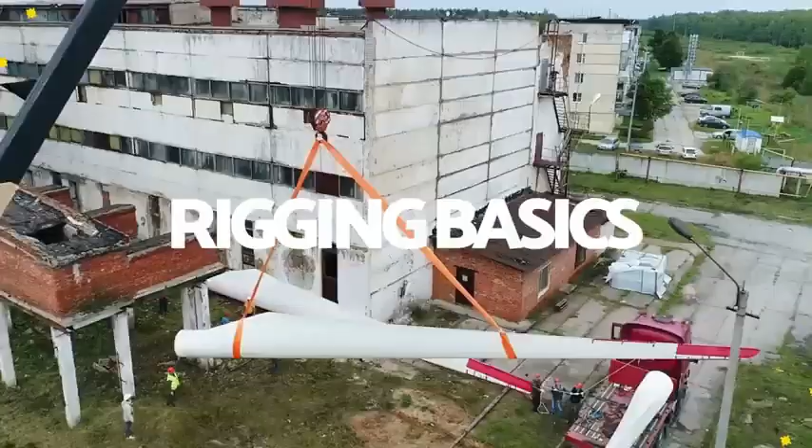In this video, you will learn some basic rigging devices, as well as some basic rigging techniques, and how to safely apply them.

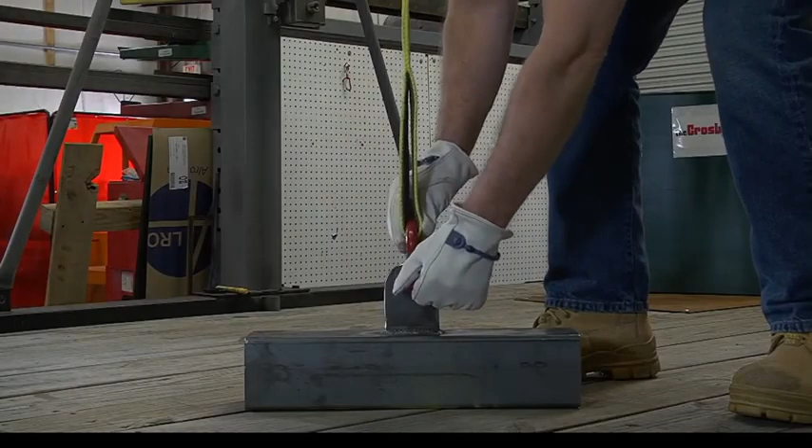In the world of rigging, there are three basic hitches: the straight leg vertical hitch, the choker hitch, and the basket hitch.

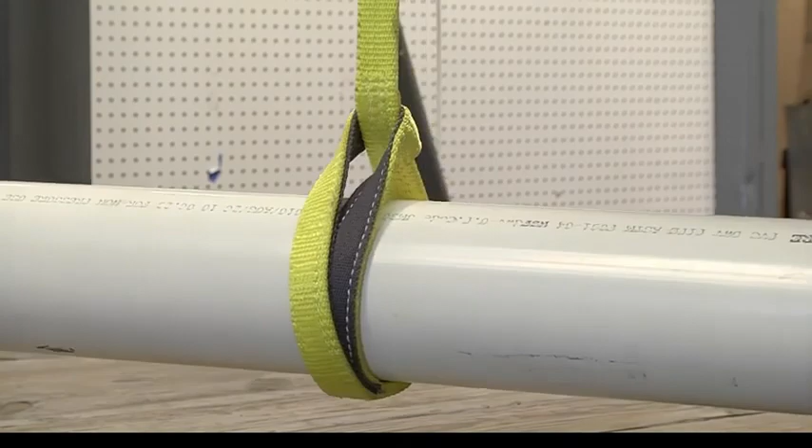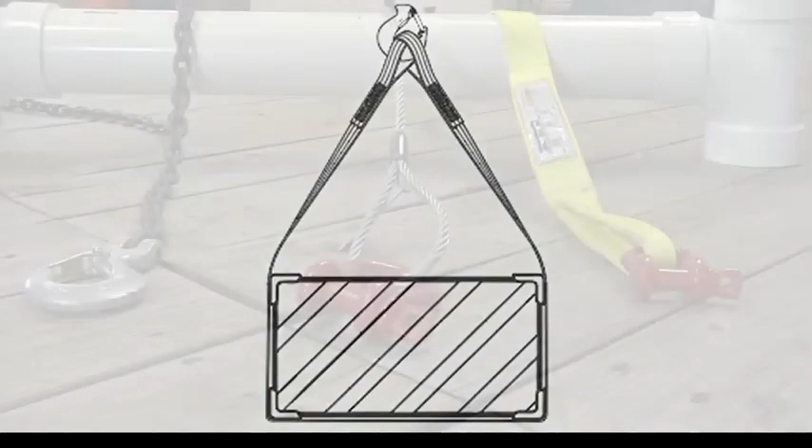Regardless of the type of sling or hitch being used, the user must ensure that the sling and rigging hardware have working load limits that exceed the actual loading imposed on the sling and the rigging hardware attached. Also, crane operators and riggers should be aware that by moving a load harshly, you can easily double the loading on the slings and hardware attached.

Synthetic or steel-based, web or round, wire rope, chain mesh. Slings are an essential part of any lifting and rigging situation, but can be confusing, and this confusion can create an unsafe situation on one of your job sites. So what sling is the right one for the job?

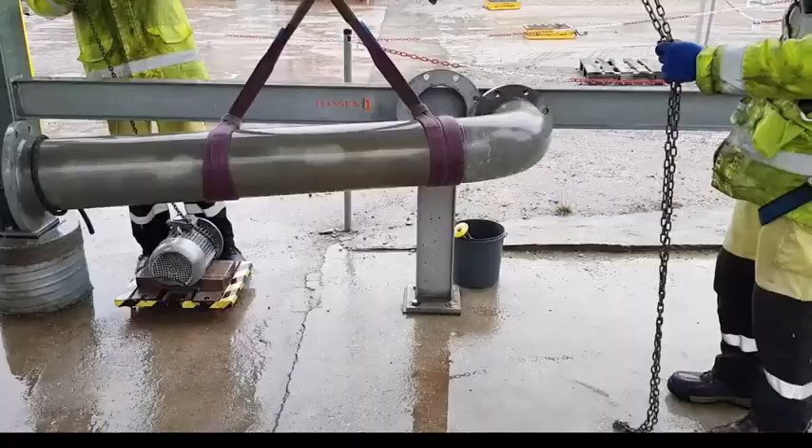From materials, shapes, and weight ratings to most common uses, we're going to cover the what's what on slings built for any task. There are 5 common types of slings found on job sites. They are broken into 2 main categories: synthetic and steel-based. Let's start with the most common types of slings.

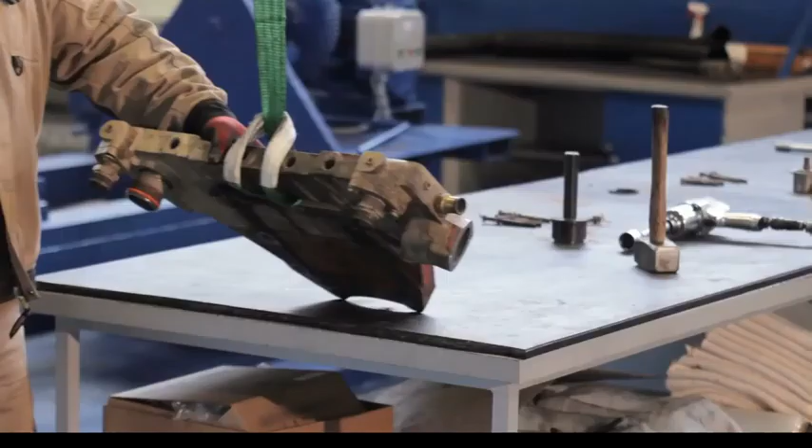Synthetic. There are 2 main types of synthetic slings: web and round. We'll start with the synthetic web sling. Synthetic web slings are flat synthetic lifting products made of webbing material and feature fittings like flat or twisted eyes on each end. Synthetic web slings are inexpensive, lightweight, durable, and strong, as well as flexible, easy to handle, and can adjust to irregular loads while maintaining a secure grip.

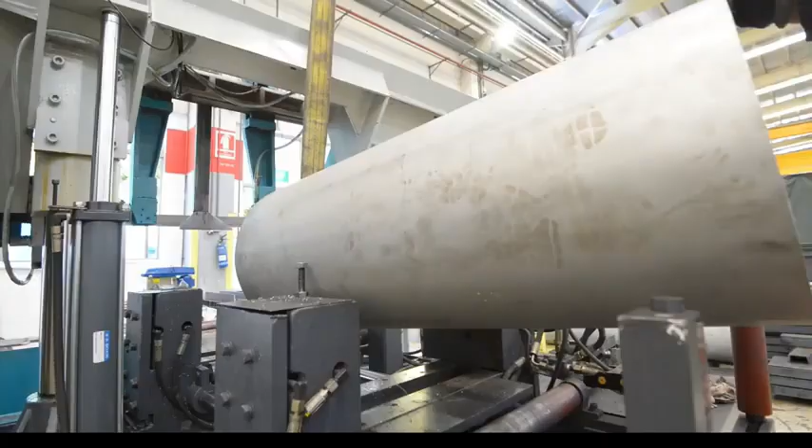Because of this, they are the most versatile and widely used multi-purpose lifting slings. Synthetic slings are exceptionally resistant to rot or mildew and are not normally affected by grease or oil. They can also be fabricated with wide load-bearing surfaces and are still easy to rig and handle. Most web slings are available in thicknesses from 1 to 4 ply and have a capacity from 950 to over 200,000 pounds.

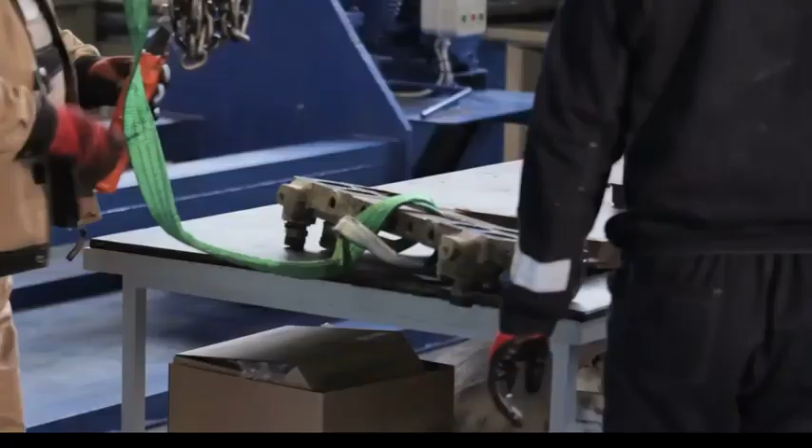Synthetic web slings are broken into 2 main groups: nylon and polyester. Nylon web slings come in either regular or heavy-duty webbing and will stretch approximately 10% at the working load limit. They can also be used in alkaline environments. Nylon slings cannot be used in acidic environments or around any type of bleaching agent.

Polyester web slings are the most popular, cost-effective sling available and come in standard and heavy-duty webbing and stretch approximately 7% at the working load limit. These slings can be used in most acidic environments or when bleaching agents are present, but they cannot be used in alkaline conditions. They also are non-sparking, non-conductive, and safe to be used in explosive atmospheres.

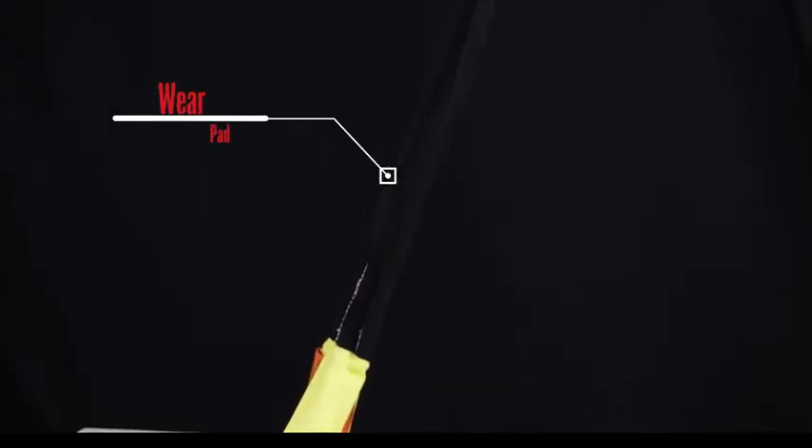To improve either nylon or polyester slings' durability, wear pads are common to protect against cutting, puncturing, or abrasion. Web slings, either nylon or polyester, are used in nearly every industry and for lifting everything from rocks for landscaping to pipes and beams for skyscrapers.

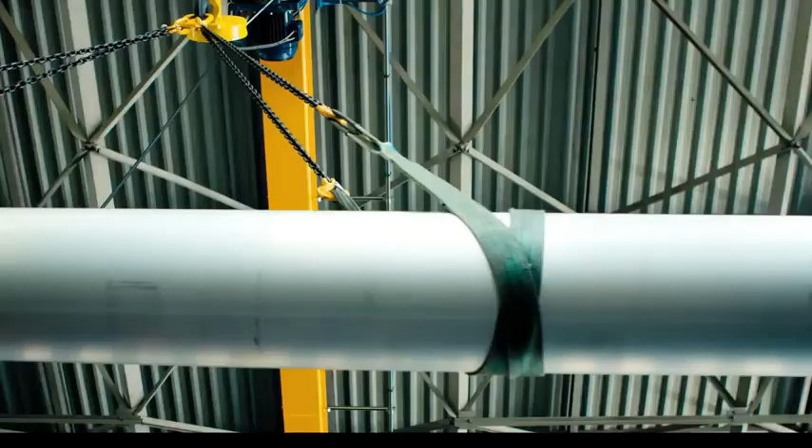Now let's talk about synthetic round slings. Synthetic round slings are most commonly made of a continuous loop of polyester yarn covered by a double-walled tubular polyester jacket and are color-coded for easy identification.

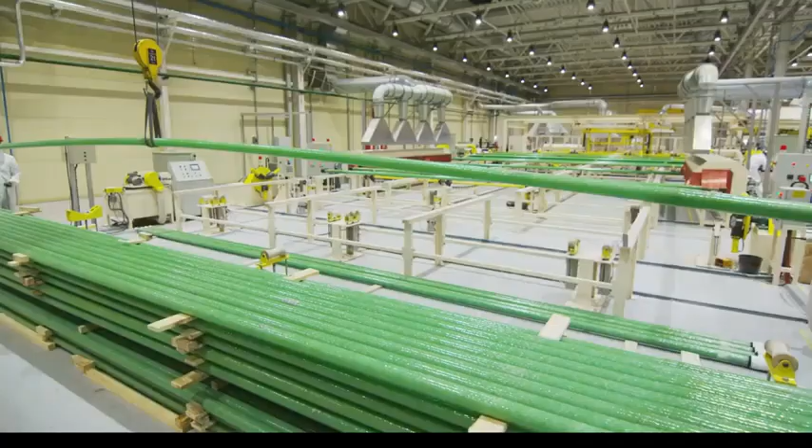They are especially useful for lifting tubes, pipes, or materials that could be damaged with other rougher slings. Round slings can be used in chokers, basket, or vertical hitches. Synthetic round slings normally range in body diameters from 5/8 to 3 5/8 inches, but custom slings are also common. Synthetic round slings have lifting capacities from 2,600 to over 180,000 pounds.

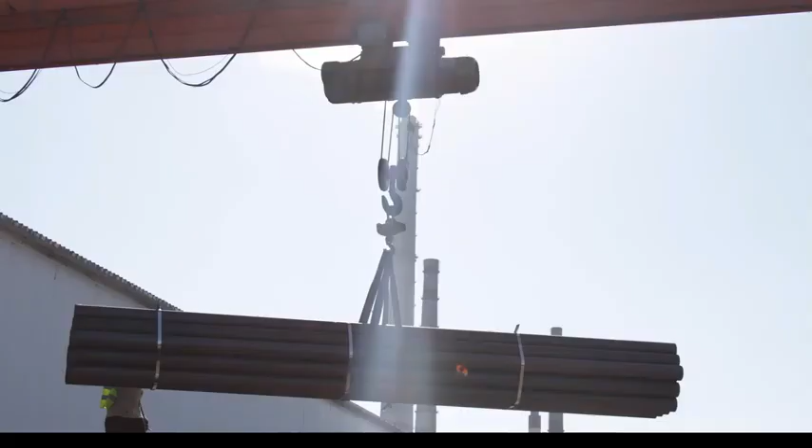Some of the advantages of round slings are the jacket protects from corrosion, abrasion, and UV degradation, as well as securely gripping the load. The jacket also resists moisture absorption, rot, and mildew, and their low stretch makes them great for lifts with low headroom.

Next, we're going to cover steel-based slings. There are 3 types of steel-based slings: chain, wire rope, and mesh.

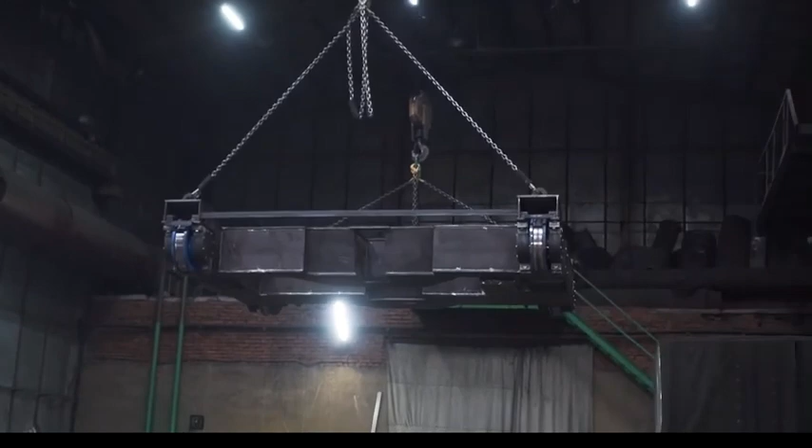This is an alloy chain sling. Alloy chain slings are the most durable of all sling types. They are well suited for extremely heavy or rugged loads, as well as high temperatures that would destroy other types of slings. Alloy chain slings are made up of 4 parts: master link, ID tag,

sling legs, and lifting attachments.

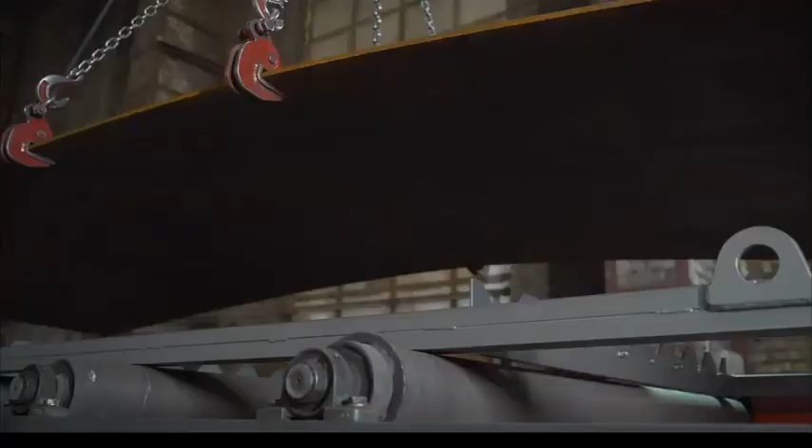Each of these parts has a few different options depending on their intended use. Like wire rope slings, alloy chain slings can have anywhere from 1 to 4 sling legs.

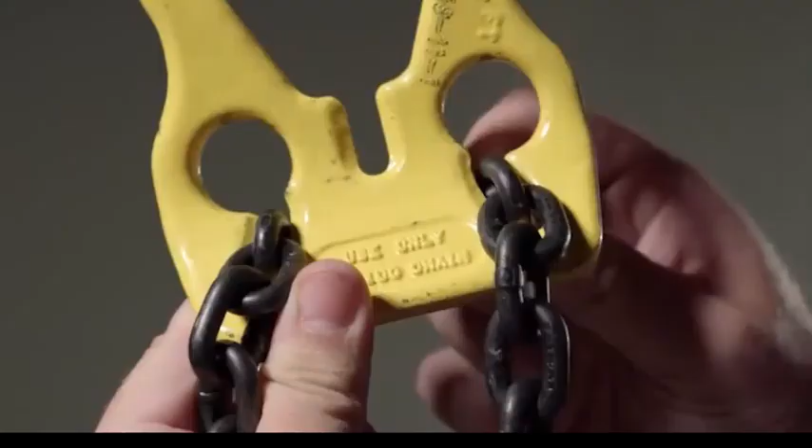Alloy chain slings are easy to inspect and can be repaired by replacing individual links or link segments. After proof testing, they can be recertified to be used in the field. They're also easily adjustable, which can be done by removing links or link segments.

Alloy chain slings can be found in 9/32 of an inch to 1.5 inches and have a lifting capacity between 3,500 pounds and over 90 tons.

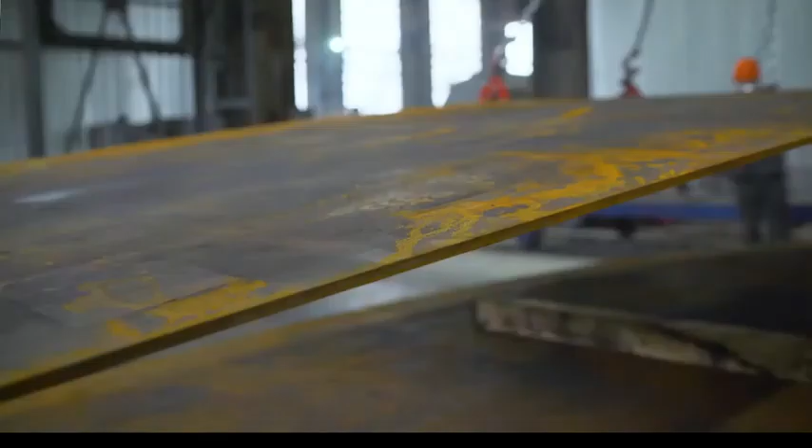While these slings are perfect for the most intense jobs, they are typically more expensive, weigh more, and have a tendency to damage the load. Alloy chain slings are mainly used when other slings are likely to be damaged, like in foundries, steel mills, and heavy machine shops. Up next is the wire rope sling.

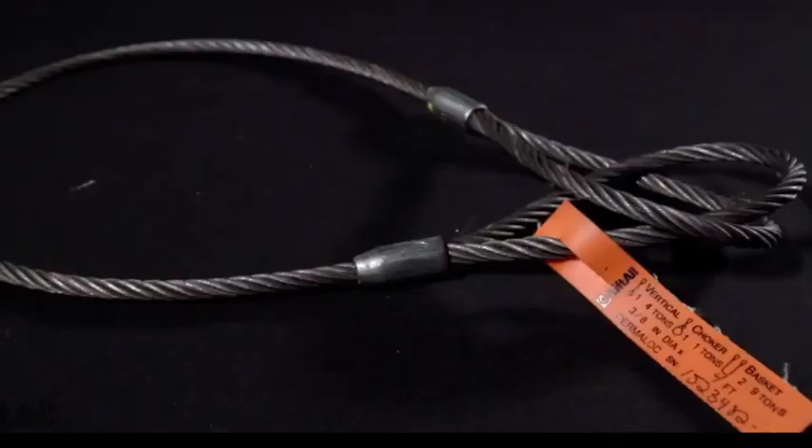The individual wires are braided into strands, which are then laid around a core in a helical pattern to produce the sling. There are different types of cores, strand patterns, and lays depending on the sling, meaning that many wire rope slings are designed specifically for lifting certain materials or lifting in certain situations.

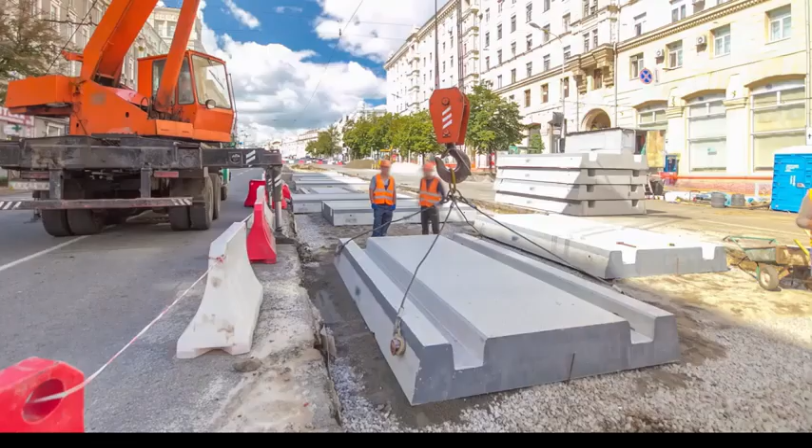Overall, these slings are more durable than synthetic slings and more cost-effective than chain slings. They have the lowest cost per ton of lift of all slings and are known for their strength, ability to bend without distortion, and to hold up against abuse or abrasive wear.

If your wire rope sling does get damaged, the master links and hooks can be reused, which helps cut down on replacement costs. Wire rope slings can range from 1/4 of an inch to 3 inches in diameter and have capacities from 1,400 pounds to 153 tons.

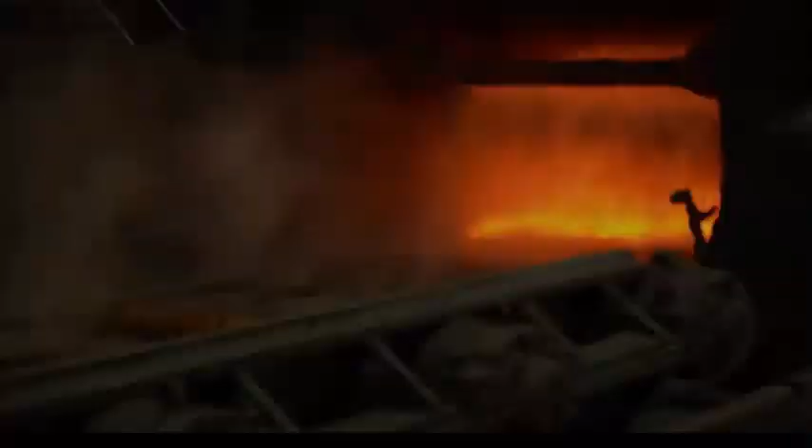Traditionally, wire rope slings are used for hot materials, crane or elevator wires, and general construction where loads aren't in danger of being damaged when lifted. They are mainly used in machine shops, steel warehouses, and other metalworking industries.

In order for any sling to be used on a job site, regardless of the type, they are required to have a legible and present safety tag. Any sling without this must be removed from service and replaced.

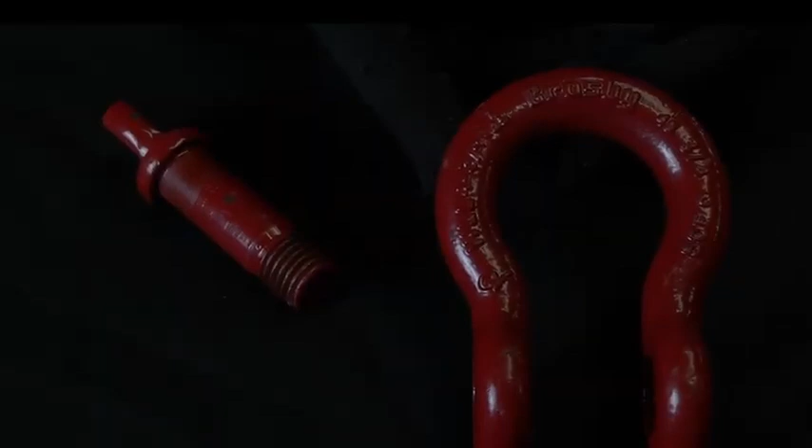Shackles are commonly used to attach a sling to a load. A screw pin shackle, which consists of 2 pieces, the shackle bow and the pin, is often the shackle of choice in pick-and-place applications.

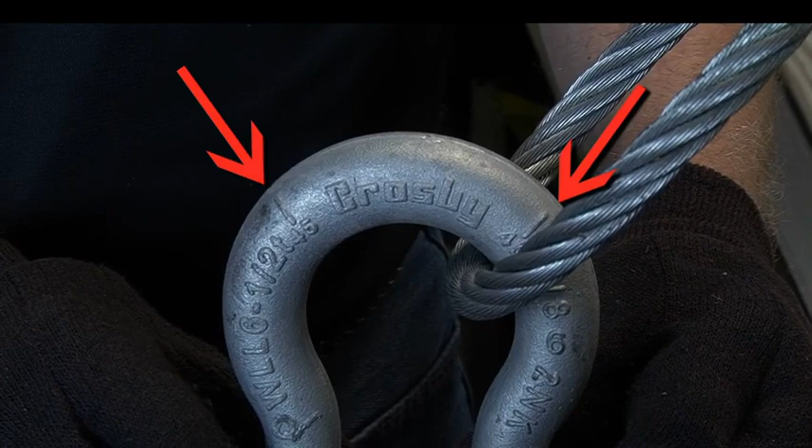Crosby shackles discussed in this video are manufactured with a patented quick check feature that incorporates 2 marks forged into the shackle bow at 45-degree angles from vertical on each side.

These quick check marks are used to quickly check the angle of a single leg hitch when the shackle pin is secured and the pull of the load is off vertical, resulting in a side loading circumstance. These quick check marks are also utilized to quickly check the approximate included angle of a 2-leg hitch.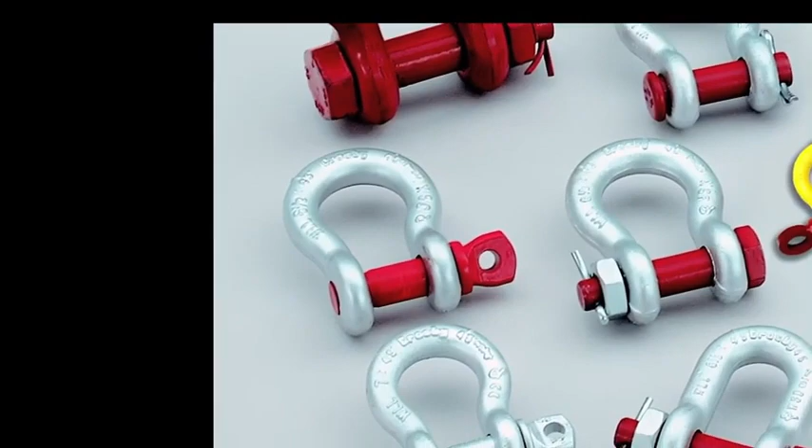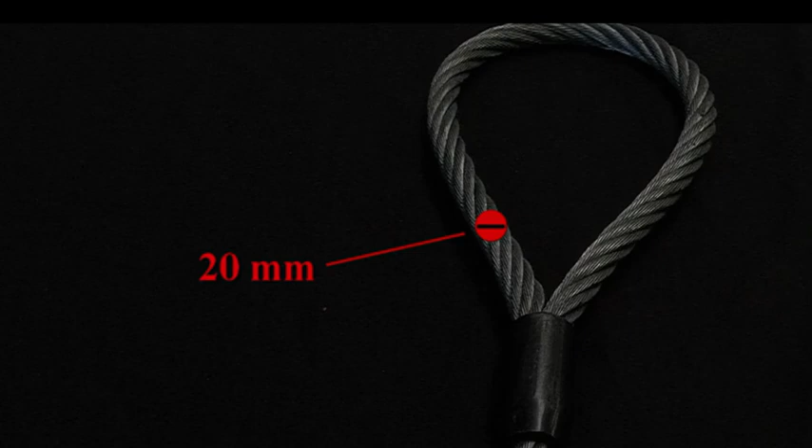Before selecting the correct piece of rigging hardware for your application, you should determine that the diameter or width of the rigging hardware being used is bigger than the diameter of the wire rope sling. An example would be, if you're using a 20mm diameter wire rope sling, the shackle attached to the wire rope sling eye must be at least 7/8 of an inch or 22mm in diameter.

It is also worth noting that the European EN standard requires that the object in the eye of the soft eye sling be not less than twice the nominal diameter of the wire rope.

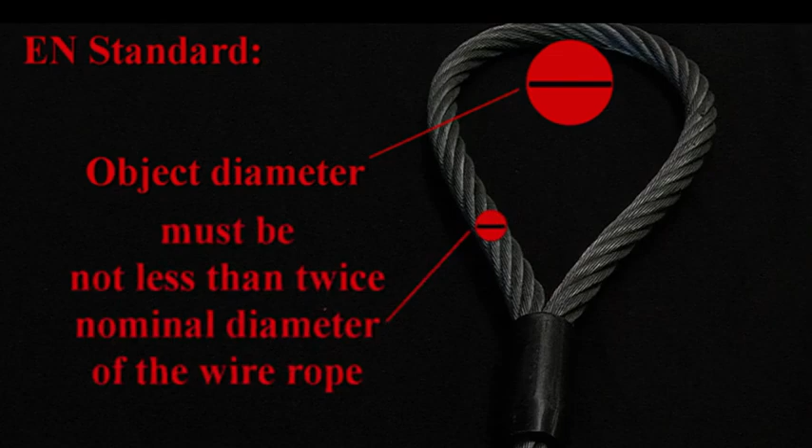Once the shackle is connected to the sling, the shackle is attached to the load with the screw pin in contact with the connection point on the load, as shown.

The screw pin is then rotated to a minimum of hand tight into the ear of the shackle body with full thread engagement before lifting or movement of the load begins.

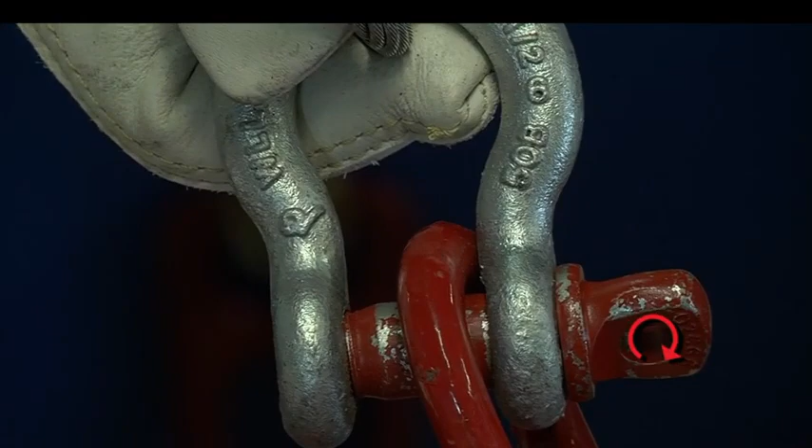The load should be centered on the shackles to prevent side loading, and the screw pin must be tightened before each pick.

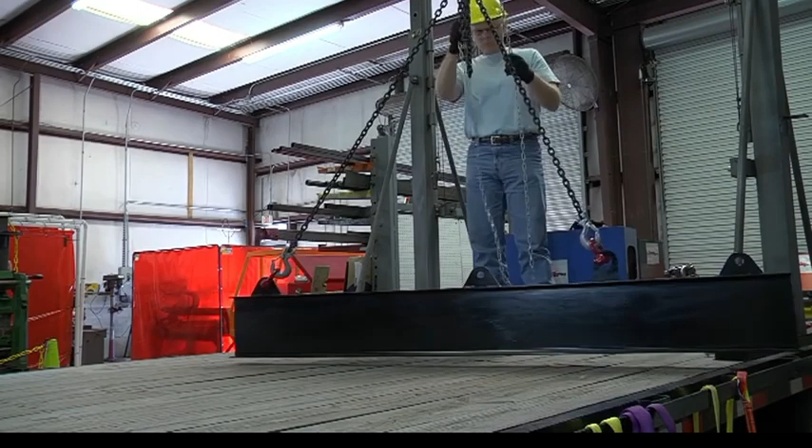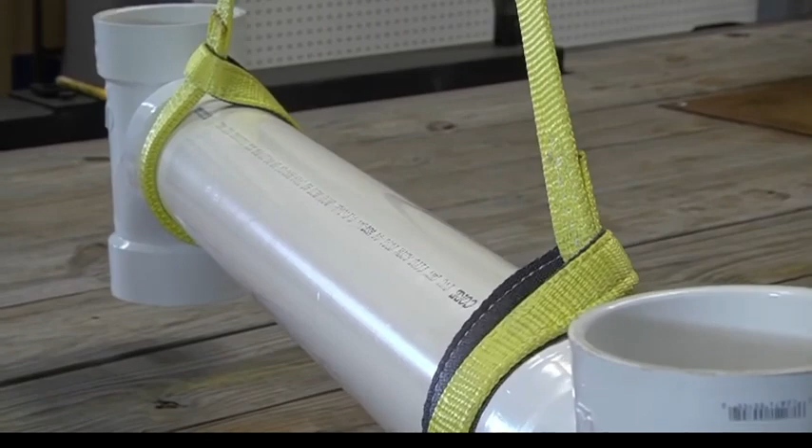The rigging triangle is a key consideration when making connections to loads and load hooks. It is formed anytime two or more slings are connected to a load and load hook. Whether the slings are chain, wire rope, or synthetic, the best practices are based on the same principles.

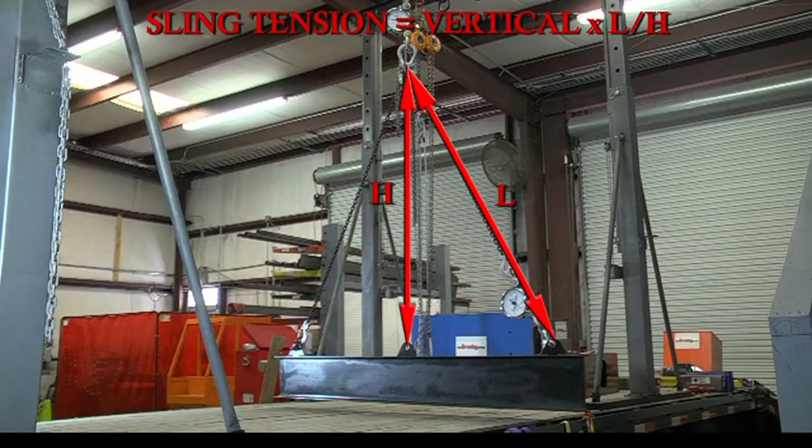Focusing on the horizontal sling angles formed in the rigging triangle highlights several best practices that are very valuable to the rigger. It is important to remember that as the rigging triangle becomes flatter, the horizontal sling angles become smaller. As the horizontal sling angle becomes smaller, even though the lifting load remains the same, the crushing loads increase.

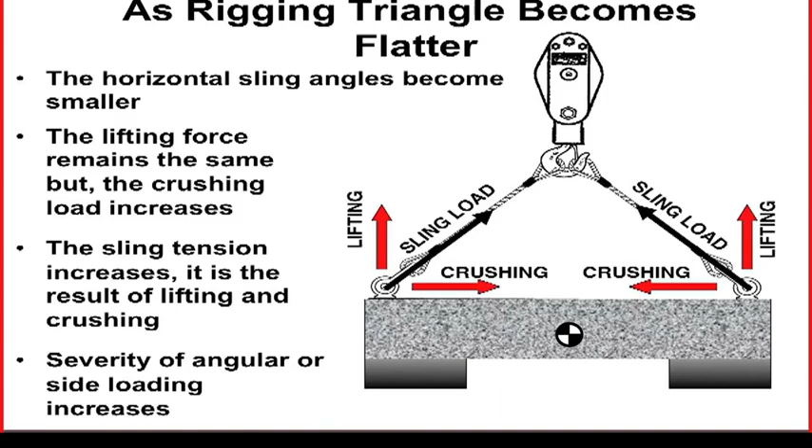The sling tension is the result of both lifting and crushing. This means as the sling angle becomes smaller, the sling tension and the load at the load connections increase, and the crushing forces pulling the slings toward the COG also increase.

The result is that at 60 degrees horizontal sling angle, the sling tension is multiplied by 1.15. At 45 degrees, the tension is multiplied by 1.41. And at 30 degrees horizontal sling angle, the tension is multiplied by 2.

These facts lead us to recognize the best practice for selecting proper sling angles. For multiple leg bridles, whether the connection is direct to the load with hardware or choker and basket hitches, a horizontal sling angle of 60 degrees is the angle of choice. This is because the multiplier is only 1.15, the side or angular load on the load connections is limited, and the crushing load is minimal.

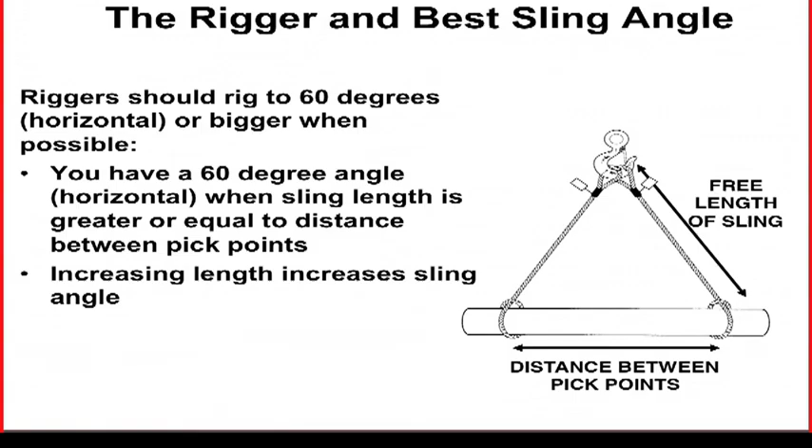A tool to use to verify that the slings are rigged to 60 degrees is to remember that a 60-degree sling angle is formed when an equilateral triangle is created. That means that the sling lengths will be equal to the distance between pick points.

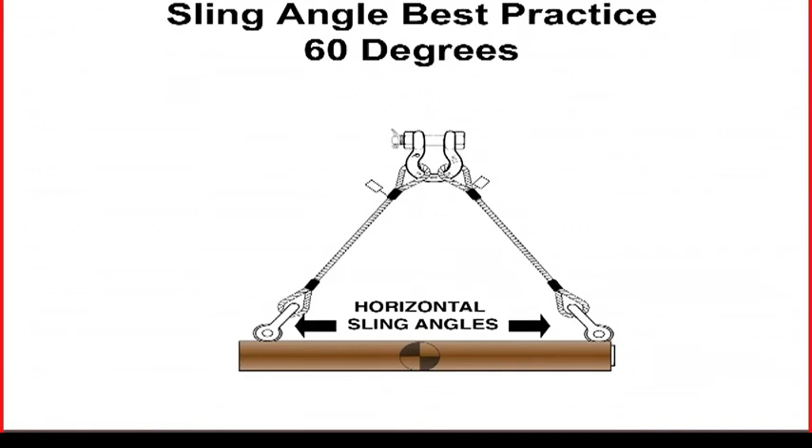It is also useful to remember that increasing the sling length will increase the horizontal sling angle and improve the rigging situation. It must be noted that 60 degrees horizontal sling angle is the best choice, but is also the minimum angle for single wrap chokers and single wrap baskets.

There are circumstances where a 60-degree horizontal sling angle is not possible. When this occurs, there are guidelines for the minimum sling angles that can be used with extreme care.

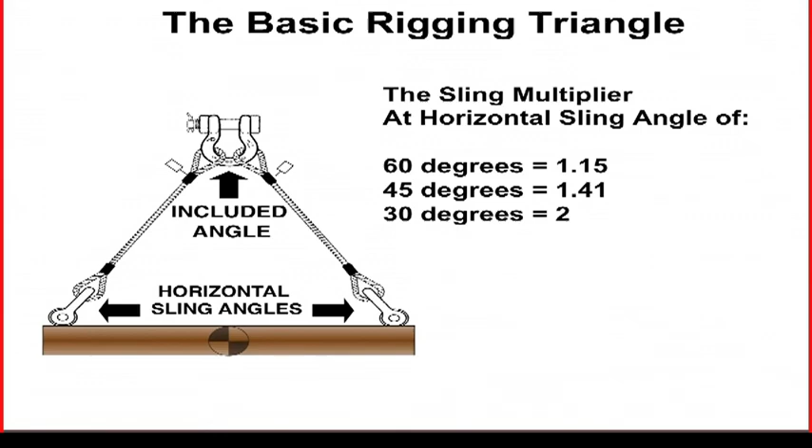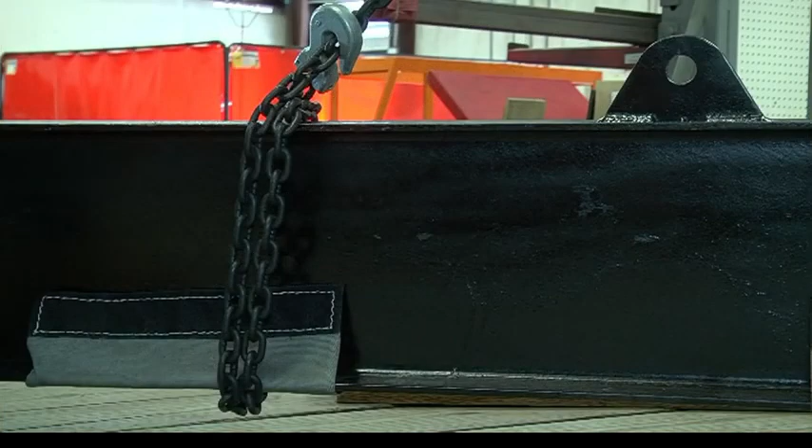45 degrees is an acceptable horizontal sling angle only for bridles connected hardware to hardware and for double wrap choker hitches. At 45 degrees, the sling multiplier increases to 1.41 times. The crushing forces pull the slings toward the load center, and the angular or side loading is very significant.

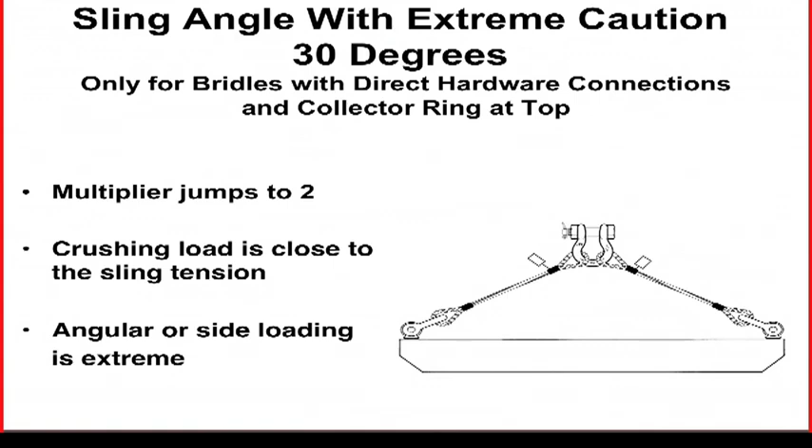30 degrees is never a desirable angle. However, 30 degrees horizontal sling angle can be used with extreme care when connecting hardware to hardware. Never use choker or basket hitches at this minimal angle.

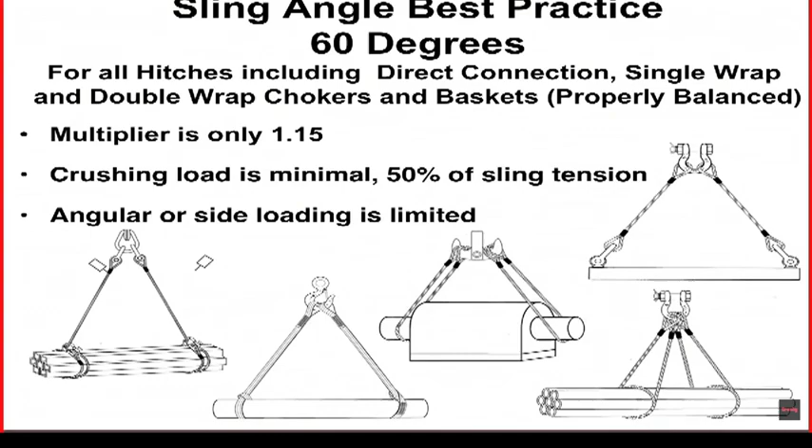Remember, best practice calls for a horizontal sling angle of 60 degrees or larger for all connections and hitches, basket or choker, single or double wrap.

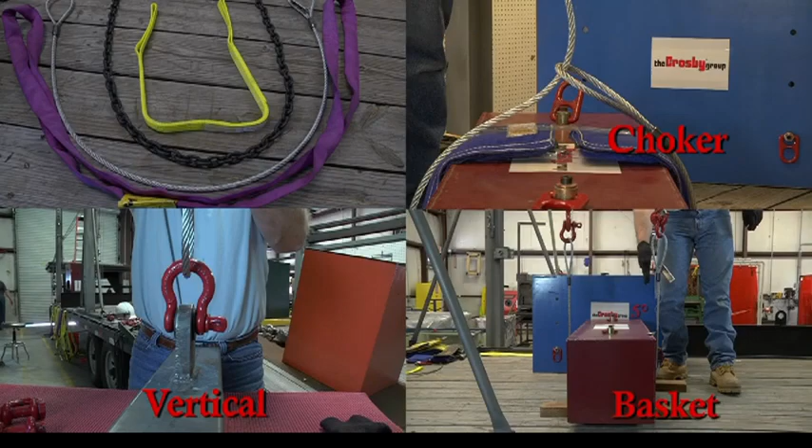One of the basic hitches when using wire rope slings is called the choker hitch. The choker hitch is formed when one leg of the sling connects back to itself. A wire rope choker hitch does not have the full capacity of the straight leg vertical hitch.

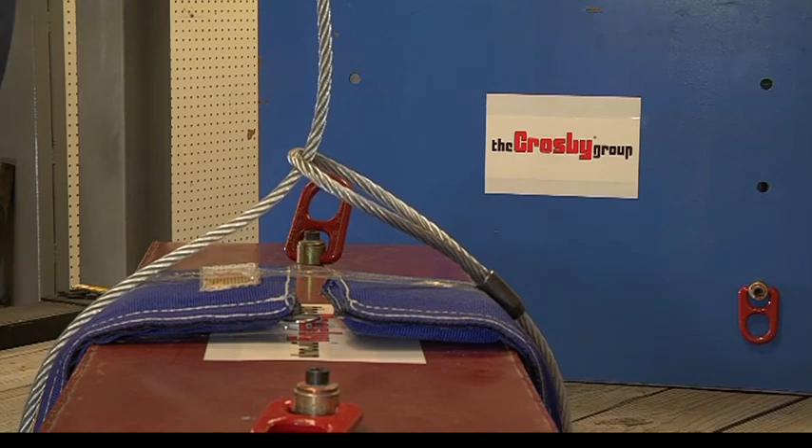The choker hitch capacity is approximately 75% of the straight leg vertical hitch. This capacity assumes that the angle of choke is at least 120 degrees.

Some standards, such as API RP 2D offshore environments, require slings of all types when used in a choker hitch application to have a capacity of no more than 70% of the straight leg vertical hitch. The sling's capacity is reduced further if the angle of choke is less than 120 degrees.

In fact, if the sling is bent back over itself, with the angle of its choke approaching 0 degrees, the sling's capacity would be reduced by 50%.

A single-leg choker hitch is easy and convenient to use and can work well on simple, short loads, but it does not always provide the load control and grip needed for safe and effective rigging.

Sometimes, multiple leg slings choked on both ends of the load are required to gain the load control necessary. If choker hitches are used, the user must always ensure that the slings cannot slip or slide along the load.

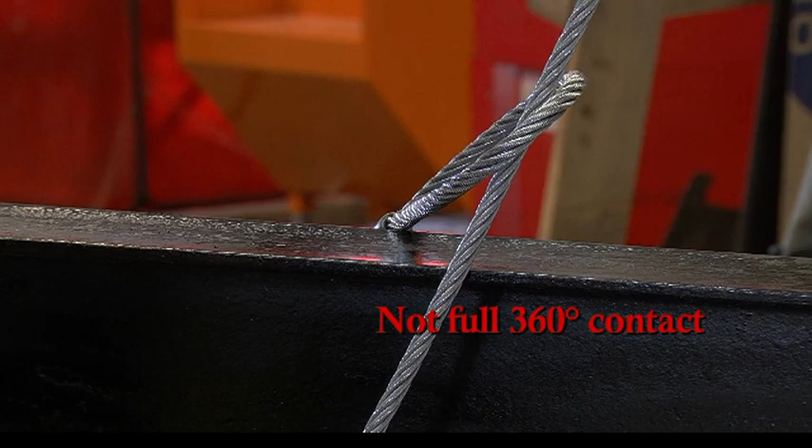It is important to note that a standard choker hitch does not provide full 360-degree contact with the load. A double wrap choker hitch is better for handling hard-to-handle loads and bundles of materials like rods or pipe that require more sling contact to hold them in place.

Make sure the slings do not overlap at the bottom of the load when you form the double wrap choker. As a final note, always ensure wire rope slings are protected from edges, corners, protrusions, or abrasive surfaces to protect the sling from damage.

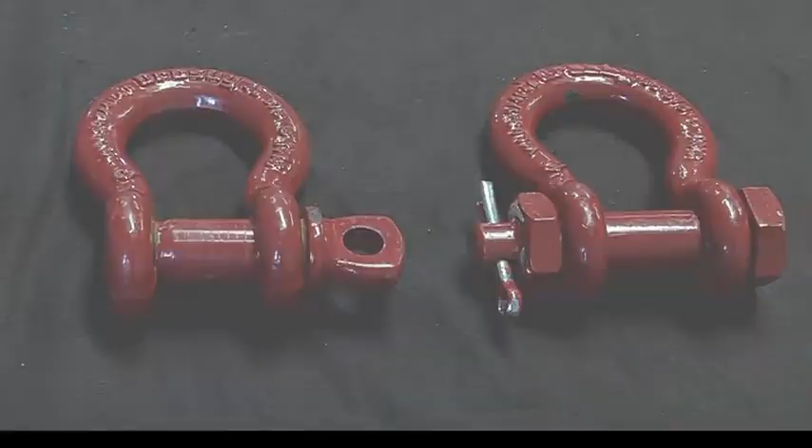Crosby screw pin and bolt type shackles, sizes 3/16 inch to 3 inch, can be used in side loading applications when installed correctly with the pin secure and the direction of loading in the plane of the shackle bow, as shown in Crosby's general catalog. However, a reduction in the shackle's working load limit is required when side loading occurs.

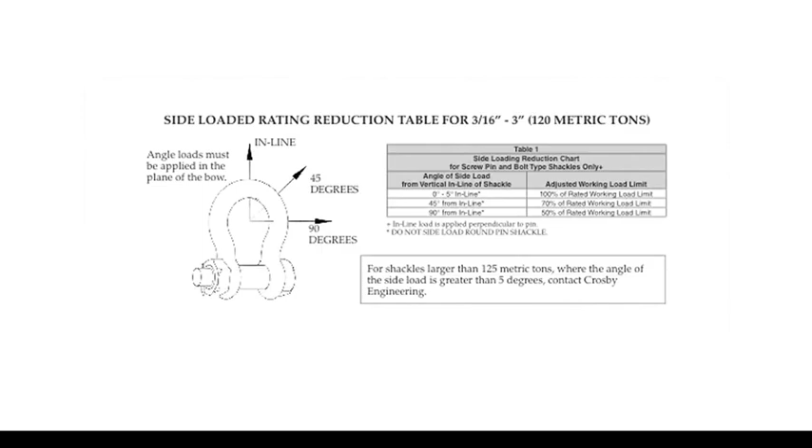It is important to point out that side loading of a round pin shackle is never allowed. It is secured by a cotter pin that could shear when side loaded.

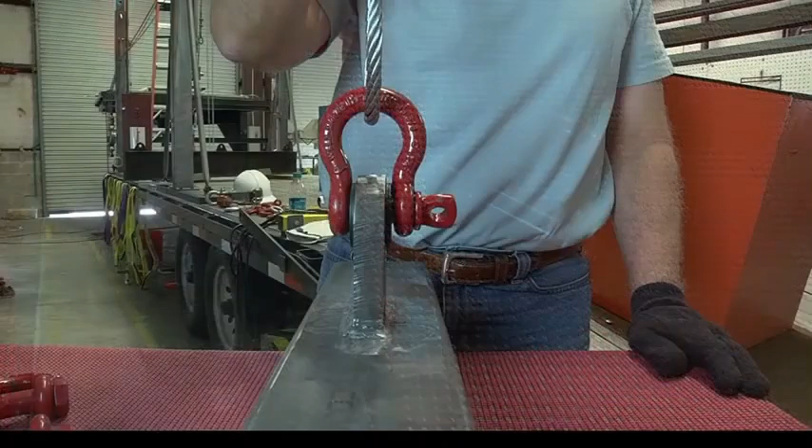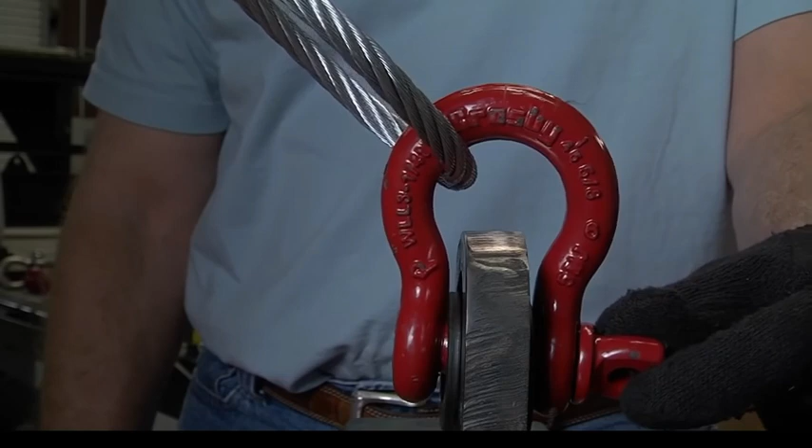When the direction of pull is vertical, perpendicular to the shackle pin, no reduction in the working load limit is required. However, if the shackle is subjected to a side load of 45 degrees from vertical, the working load limit must be reduced to 70% of the shackle's rated capacity. Thus, when a screw pin or bolt type shackle is subjected to a 45-degree side load, it loses 30% of its published working load limit.

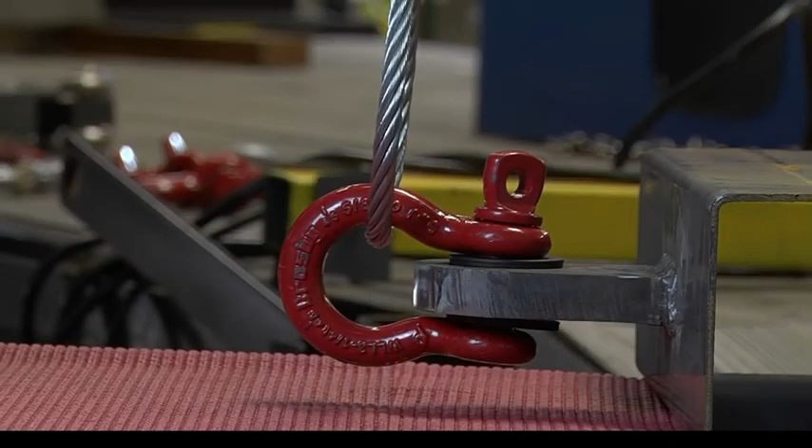If the screw pin or bolt type shackle is subjected to a 90-degree side load from vertical, the adjusted working load limit would be 50% of the shackle's rated capacity. Thus, when subjected to a 90-degree side load, the shackle loses 50% of its published working load limit.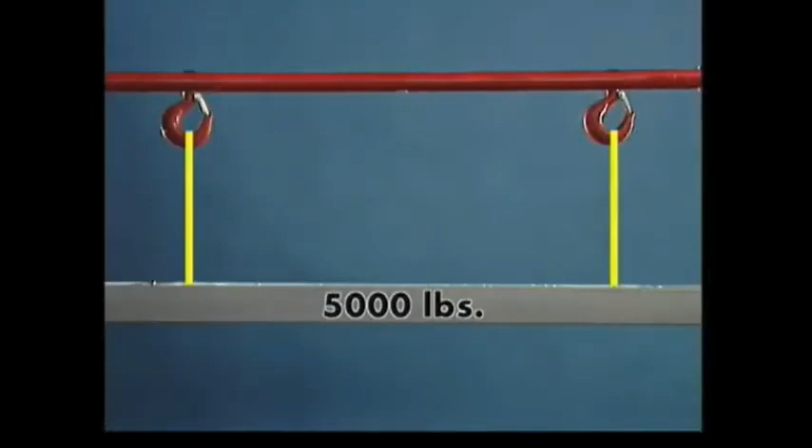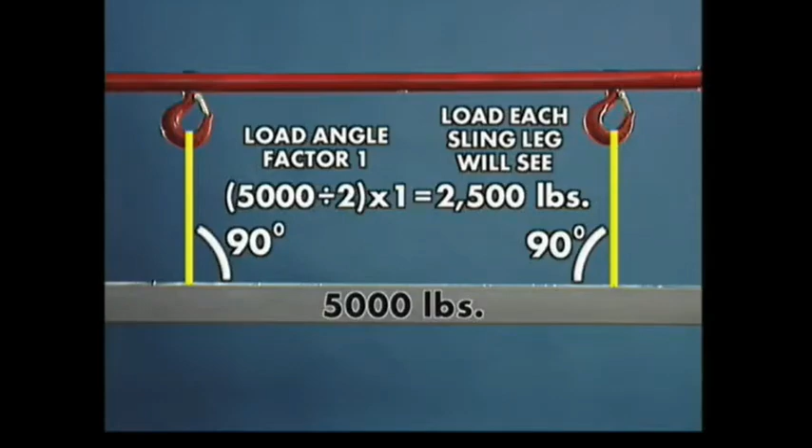Using two slings in a true inline load, each side will see half the total weight. From the Crosby lifting guide, notice that for a 90-degree horizontal sling angle, the load angle factor is 1. In this example, the total load is 5,000 pounds, divided by 2 for each sling leg, then multiplied by the load factor of 1. The result is that each side lifts 2,500 pounds.

To select the proper bolt, refer to the Crosby lifting guide. Note that the panel does not mention the S279 because the information is the same for all Crosby shoulder eye bolts. We need to select an eye bolt whose working load limit exceeds the required load of 2,500 pounds, which in this case is a 1/2 inch machinery eye bolt with an inline working load limit of 2,600 pounds.

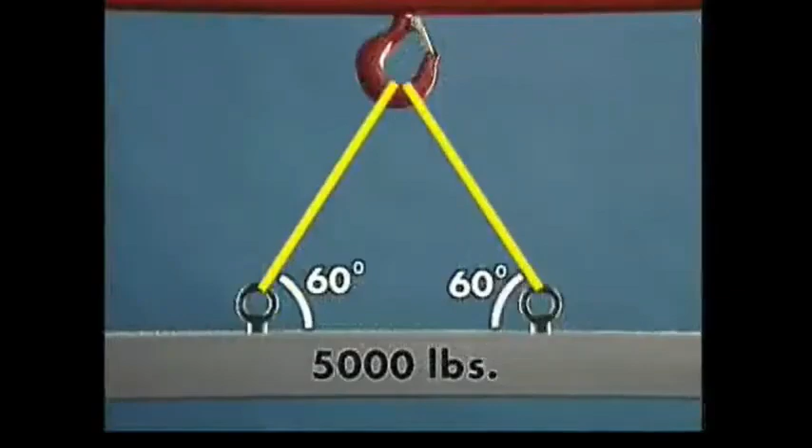Let's now look at how increasing the horizontal angle affects the size fitting required. For 60 degrees, the load angle factor is 1.155. Again, we divide the load of 5,000 pounds by 2 and then multiply by the load factor to determine the load each sling leg will see. In this case, each sling is loaded to...

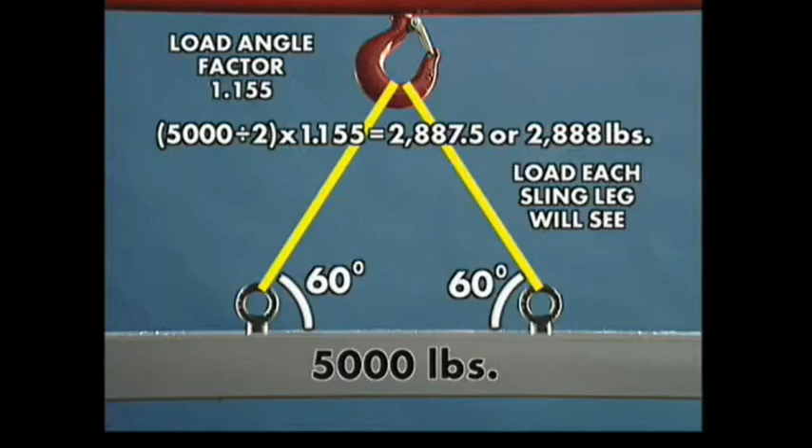2,887.5 pounds, which we round to 2,888 pounds. Referring to the lifting guide, you will notice 4 columns showing the rated capacity of Crosby shoulder eye bolts at various horizontal angles. Crosby shoulder eye bolts have a catalog rating based on inline loading. As side loading occurs on the eye bolts, they must be down-rated. The smaller the horizontal angle, the greater the reduction in the working load limit.

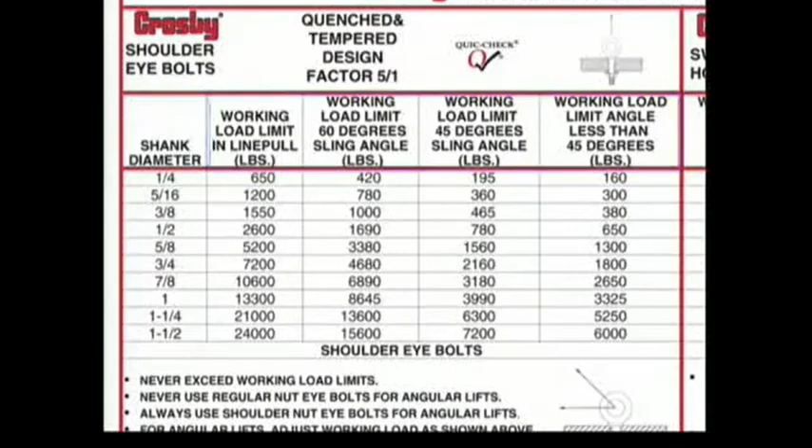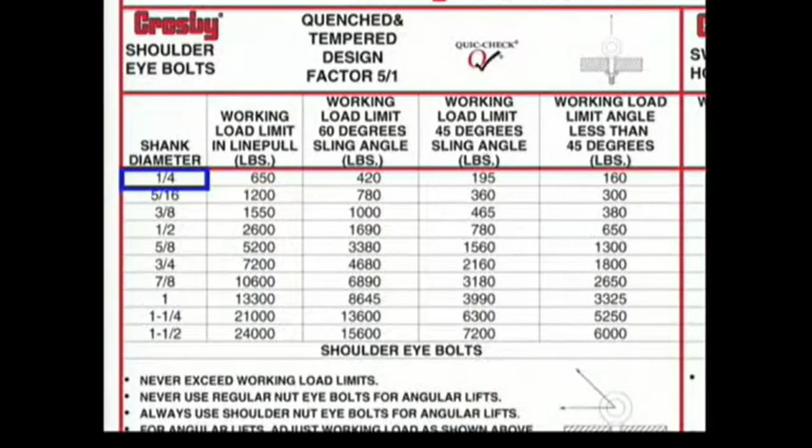As an example, let's look at the 1/4 inch size. At 90 degrees, or inline, the rating is 650 pounds. As the horizontal angle changes, so does the resulting working load limit of the eye bolt. At 60 degrees, the rating is 420 pounds. At 45 degrees, the rating is 195 pounds. And at horizontal angles less than 45 degrees, the working load limit has been reduced to 160 pounds.